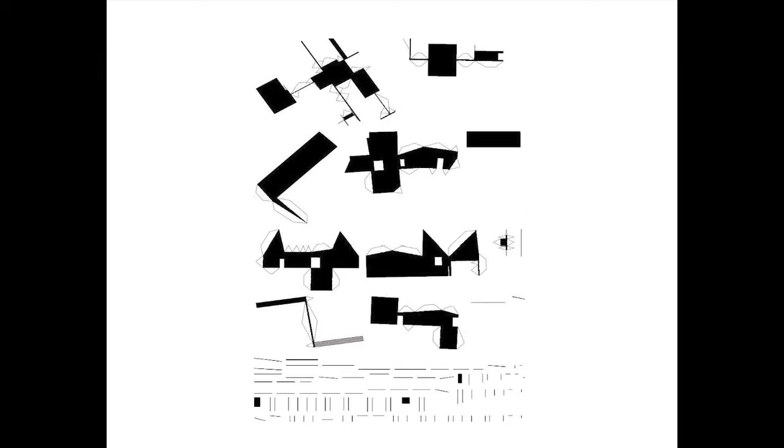So the kind of rooms developed out of the idea, because it needed to be modest. Studios are not fancy places. So it's concrete floors, drywall, nothing particularly exciting. So we were inspired by take-out Chinese food boxes, which is where this comes from. So I guess I should just walk you through how it's being used today, which I doubt is how they're going to use it a year from now. That was an existing studio. This is a pool house that we built so they could watch this house get built.

And then these are the white boxes. And these, which are clad in a burnt wood, which is a natural preservative by burning cedar. The Japanese use it a lot. They call it sugi, I think. These bars have services, closets and bathrooms. Green roofs where we could, photovoltaics.

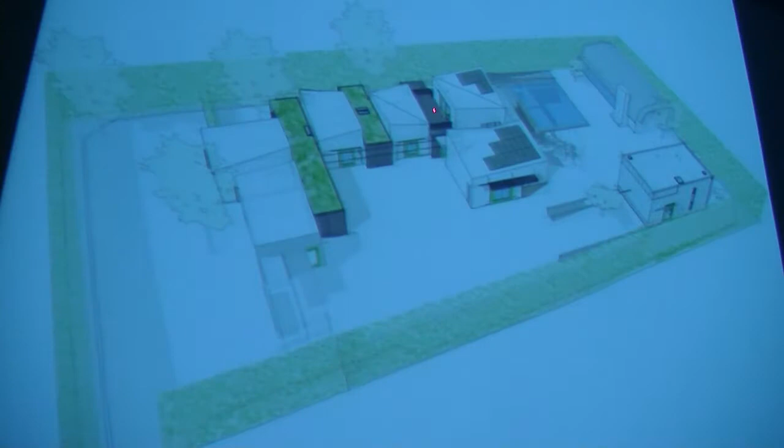So how's it being used now? Pool house at the moment is a guest house again because they've moved into the main house. But their kids are growing, and I guess in a couple of years' time, one or 2 of them will move from the bedroom they share now and maybe use that room. This was designed as a studio but is currently full of junk. This is the master bedroom at the moment. This is a dining room but started out life as a family room. At the moment, this is really being used as a family room. This is the living room, and this is the kitchen with a little den upstairs.

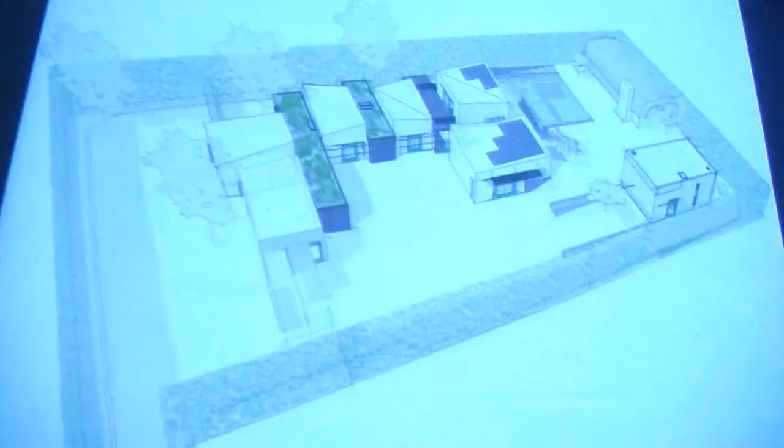And there's the pool. So what you've got is what we call in Australia a battle axe lot, and what you guys call here a flag lot. And it's surrounded by hedges that, if Jamie, the guy who owns the house, hasn't got his gardener to hack at them, are usually about 16 foot high. So they've got a very secluded, wonderful compound setting. And the idea is that you move from all of these rooms.

So that's the second part that flips it. So how do you make an indoor-outdoor connection that isn't about blurring the distinction between inside and outside?

Circulation runs outside. That's not particularly new. Traditional Chinese houses do it. There was a movement in the 1920s, and a bit before that in the States, particularly in Pasadena, where this house is, of the healthy lifestyle where people wanted fresh air, and the idea of moving outside to go inside was present in a lot of house designs. It also turned up in Australia in an idealistic community called Eltham.

But anyhow, here's the deal. It's pretty simple. These white boxes have a door on each side, which slides. They have a vent above, and then a highlight window that draws air up and through for ventilation. We're talking hot, dry summers, not as hot as here, 90s and 100s. You need heating in the winter, but it's a pretty mild winter.

So now I've got to go through this a bit more, getting bored with this slide. That's up at the top, next to the kitchen. And if you come down the stairs from there, you'll see another attempt at our investigation of very cheap materials, which we love - pegboard, used here as an illuminated ceiling. The kitchen beyond - you're just doing kind of a walking tour. The pool house, the pool, the garden, and the den above.

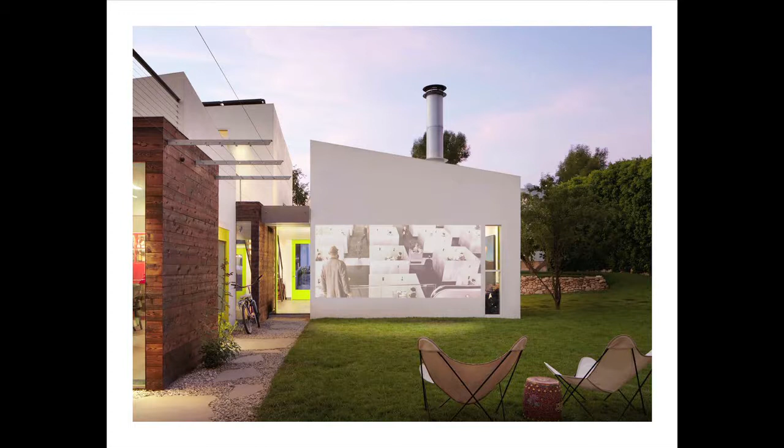And then coming back around to the lawn, around the studio, and then movies outside - why not? You can sort of see how the things collect. It's a fantastic party house, which I didn't purposely design as a party house. But we went there to a gathering to fundraise for the Architecture Museum in LA, and there were people all over the place, and it was one of the best things I've experienced for work that I've done, where everybody's activity was framed. It was fun.

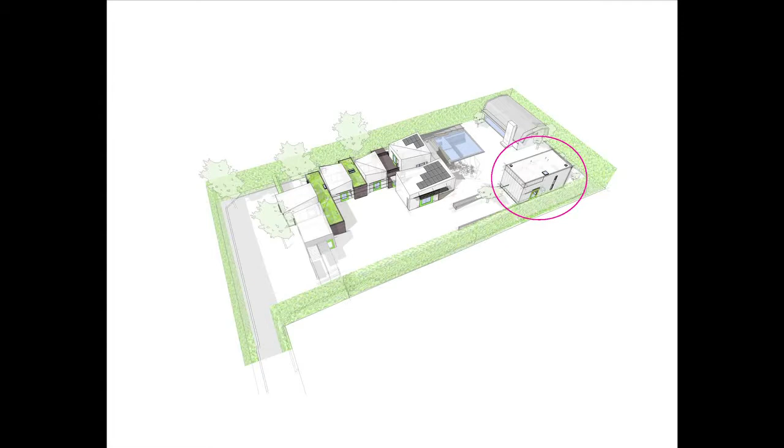I want to talk to you a little bit about the pool house, where I said they lived before the main house was completed. It, like the main house, doesn't have air conditioning. We wanted to be responsible sustainably, and so did they.

So we used a system called an earth tube, which is buried beneath the ground, going down 3 to 6 meters. In this case, it's using the old bomb shelter, because in California, people were worried during World War II that there would be a Japanese invasion. So these things turn up periodically in houses.

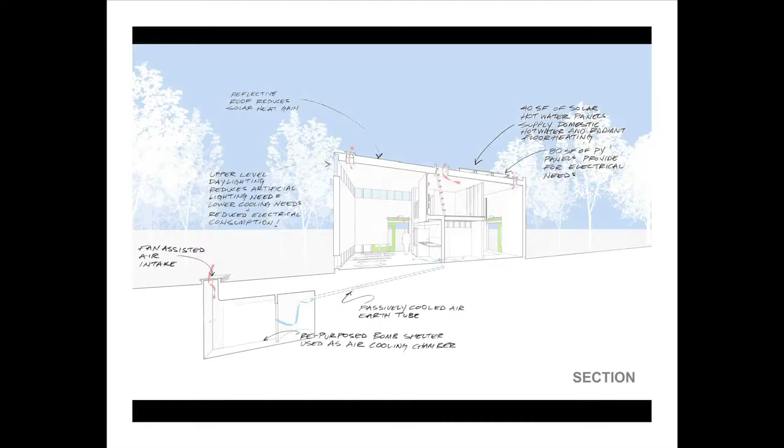For the house, the earth tubes run to a different place. But the deal is you bring air in, fan-assisted, from one side of the yard. You take it underground where the air temperature is cooler. It cools the air and brings it into the house. That way you can responsibly leave the doors open all the time, which these people were prone to do and still do, and it doesn't matter. So they said last summer, their first summer in the house, that it was comfortable all through.

And this is the pool house. You say, well, why is the pool house different? It's because we had an existing building, Anne Elizabeth's studio, which was a different genre of building. If we made one style onto that different genre, it would have looked like an outsider. So we made a building with a slightly in-between approach, collecting everything as belonging, not having one thing feel awkward in the setting.

In other words, to make what you have work well is equally important as to make what you have look good. Am I making sense? You get more value out of honoring what's there as well as what you make.

And sort of the views of it. That's just cellular polycarbonate with metal siding and drywall, blackboard going around, and that wafer board stuff. None of it is rocket science, and all of it combines to create something with an evocation bigger than the parts.

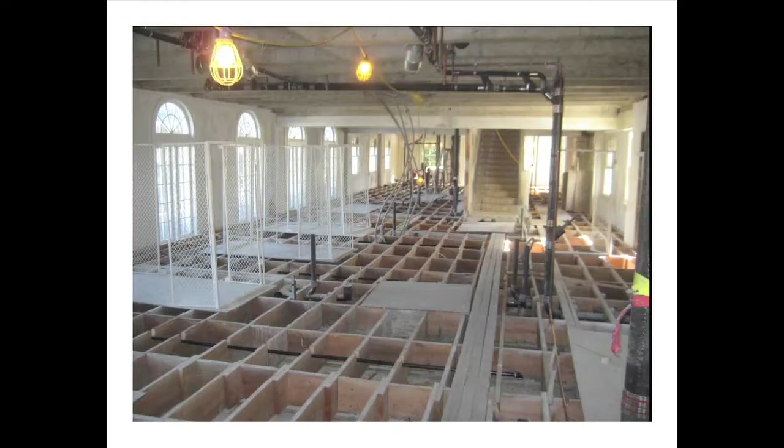If you want to add new systems into a building of this vintage, and you've got principal rooms on the ground floor, and you don't want to see conduits and ducts running through your ground floor, there's a strategy of introducing an interstitial floor, which is what this is. All the pipes and conduits run here so that the ceiling below can be free of any kind of modern service routing.

So downstairs, the ceiling is clean. Principal spaces were restored and cleaned up. Anything we added as if it was furniture, sitting within the space as a whole. This is all, for us, not difficult decisions.

We restored the gym. This isn't quite done, they needed to clean the railing, but the contractors are always sloppy, they will get to it.

This used to be the natatorium, which I told you is a pretty significant item in an African-American context. Why? Because there weren't that many opportunities to go swimming in LA unless you went here, if you were black. Although they needed this for the housing program, to be a lounge space, the pool is encapsulated so it could always be restored, and the tiles were kept, and the line of the pool kept, and a sort of narrative memory of swimming lanes used as a graphic, again, to divide a wall from a volume so that it doesn't belong to that volume. So the volume has some integrity still, even though it's serving a completely different purpose.

Housing units were restored - well, not really restored, extended - because a housing unit in 1926 doesn't meet the kind of standards for what you need in 2013, whatever it is. So they all doubled in size, and that meant that to take advantage of a grandfathering for parking, which is a long, complicated issue, the best use out of this property was to replace every unit that was removed. So we added, I think in the end, 30 units new.

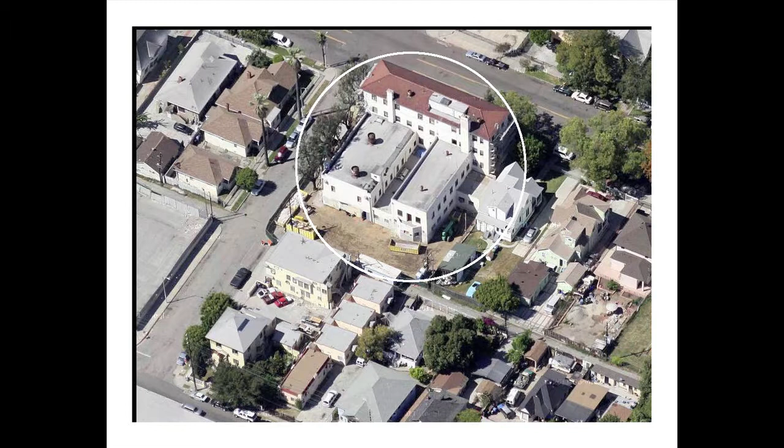Well, we did. So this is how we did it, because we followed the rules. The rules said that if you had a historic building and you wanted to take advantage of historic tax credits, which are an interpretation of how the historic preservation guidelines are interpreted in the state of California by a bunch of people who need to get a new life, because they're stuck in one way of measuring how you can do things. We have to keep experimenting about different ways, and they need to have more opportunity for interpretation, and this is not the case.

So what they wanted us to do was keep whatever addition we did below the eave line of the principal volume. That meant you built over a 2-story volume here, 3 stories excuse me - there's the pool where it used to be - and you could build over the back piece as well. That would keep you below the eave line, but it didn't give you the number of units, so the economy of the project was thwarted.

This is an affordable housing project, so they also wanted at each opportunity to make as many housing units as they could, because it's supportive housing for kids coming out of foster care, for people who had difficulty living in the world without medication, that kind of deal. That was tactful, wasn't it?

Okay, so we worked out if you do this, of course we can do that, but the client's not happy, doesn't have enough units. We start talking about what it means structurally, and this is a masonry building. This wouldn't be a masonry building, because we don't build masonry cheaply in LA. But the seismic difference between the two meant that the cost of doing this was outrageous.

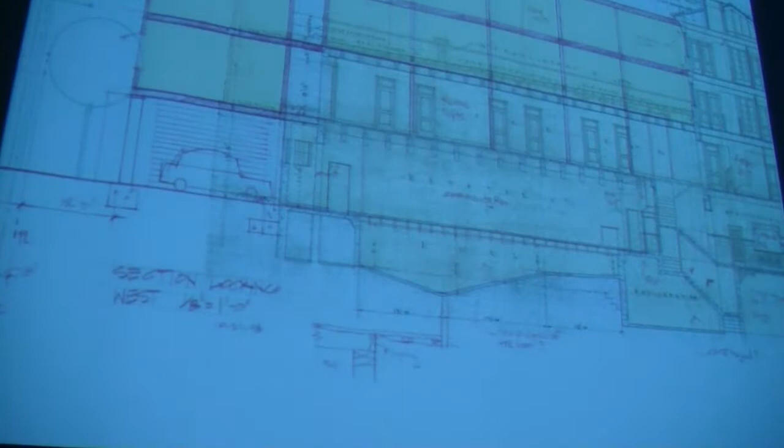So luckily, our client, who was an architect, said, guys, this is stupid. We'll give up on the tax credits. We will restore the building as faithfully as we can, which you saw how we went about it. We need another way to do this. And that's when we came up with this system, just building on the back part of the lot. Now, we're still in the sort of structure of how you make this, keep the integrity of the old building.

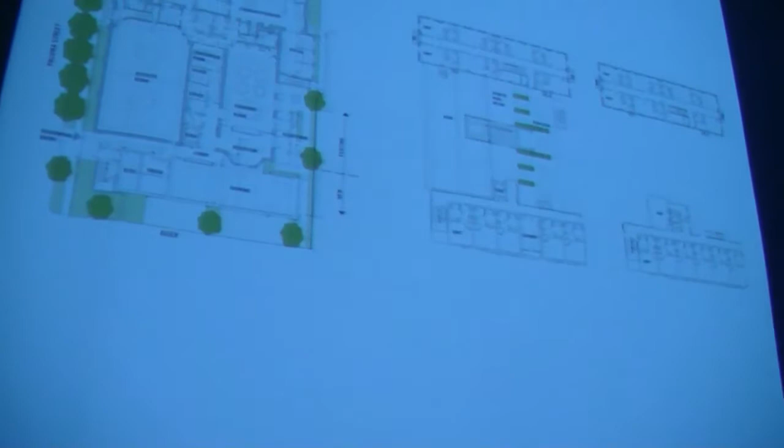So in this, we have two program components. Program component one is this, through here, entered from 28th Street, and that's community programs, which are available to residents of the building but run independently. And then we have a second entry here to the housing that is on this floor, that's the natatorium with the pool, and now is the lounge, that uses this space and the upper floors, okay? And they work independently and need to for program reasons.

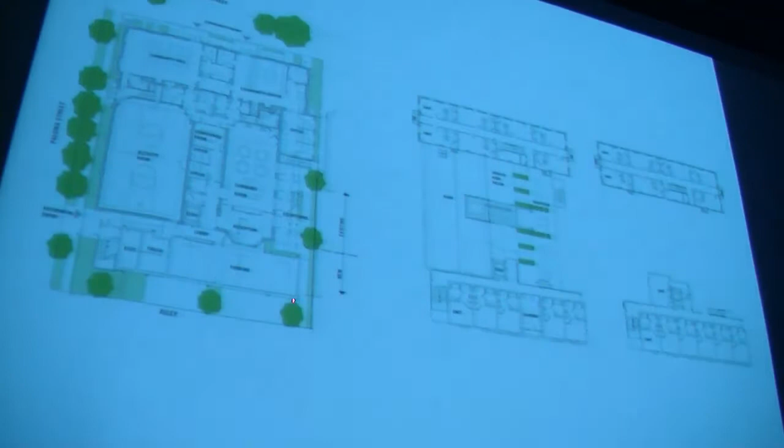So this was where the identity of this addition was going to begin. And what we did was we built higher than the eave line, not much, I think it's 5 or 6 feet. And there's a deck space here, which I think Paul Williams had anticipated you could put another floor on sometime, but at that time there was no seismic code, so that was a whole different era. And that was the logical place if you wanted to be expedient to put mechanical equipment.

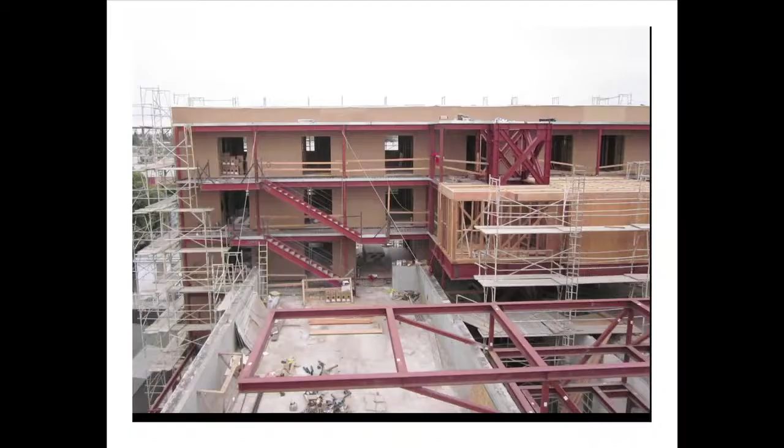And we said, hey, why don't we hang a truss in the light well? That means we can get the mechanical equipment to hang in the light well and across the roof of the gymnasium, which wasn't a flat roof. And that way we can release this roof here as a social space. And so we cantilever also from that truss an arbor that focuses what can become a social space between the new addition and the old building.

So doing that, we made a key social space for the project, which links old and new, and reveals completely intact the existing building, including the back, and the fantastic portraits of African-American leadership through the years. These are medallions, which have this beautiful curly Q ornamentation around them. So this seems to me like legitimate historic preservation that honors the past.

Now we get to the difficult bit. How do you add the really difficult bit of the weight? So remember, when you look at those buildings, what people conventionally look for is ornamental compatibility. And we said, that doesn't tell us anything strong about what that existing building was. Those buildings were masonry. They were heavy. If we do a light, ephemeral kind of cladding to our addition, we're going to show off the strength of the original while we make something distinctly different as the addition. And that was the route we took.

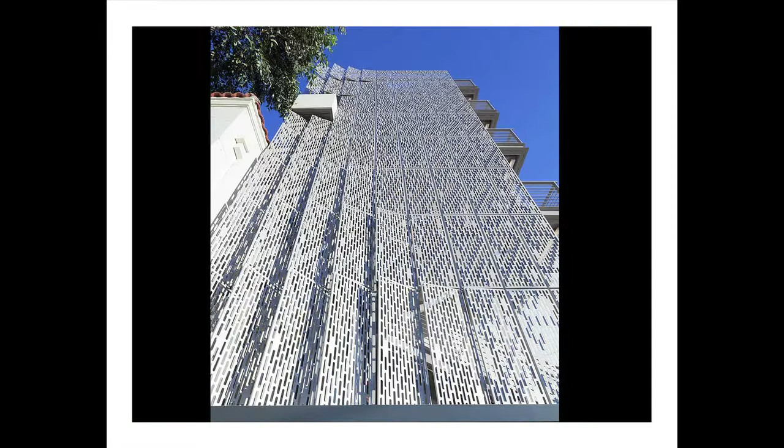And what you're looking at is punched screens. Could have been done laser cut, but we worked out there was some economy to punching it, the kind of thing that happens in our office. So this is feathering out this way so you can see views down to downtown. It turns out that when you punch, for very little upcharge, and still much less than laser cutting, you can cut aluminum so that you have hanging chads, if any of you vote. And those hanging chads can introduce a second level of pattern. In this case, the second level of pattern is drawn from that ornament that I referenced around the medallions.

And it was a key narrative for the community to understand why we didn't just copy the original building, which, if you don't think about buildings in a different way, is the only logical conclusion you can come to about how you would go about adding to that building.

So this was some of the tests. This is cardboard. This is fussing about whether it should be 30-degree angle, 25-degree angle, 35 angle. So you think you're crazy with your projects. It doesn't stop. You'll get out there. You'll do the same kind of craziness.

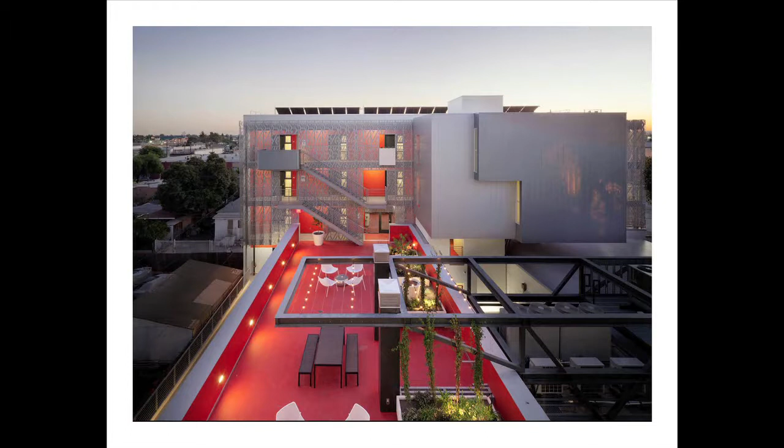What we found, which was an incredible thing, was how the pattern was ephemeral. At different times of day and different orientations, those hanging chads were visible or not. So the pattern came and went. So we got this added bonus of this kind of magic trick. And then in the evening, you look back over it and you can see the key components as I've set them up. The social space, the arbor that's really the top chord of the truss, the thin ephemeral skin of the building.

This cantilevers over to get the final 2 rooms they want. The elevator's in there. The box behind is a dumb stucco box, dumb as dirt. And the really strategically expensive strategy was this skin. All the rest of the money went into restoration, which is like a money pit. It's just like that Tom Hanks movie.

Inversion. So we've talked about weight. Now we're going to talk about turning ideas about the roles of things upside down.

I'm probably going way too slow. Are we okay? We're okay. All except for the guy in the back row that's snoring. Oh, hey. Wake up.

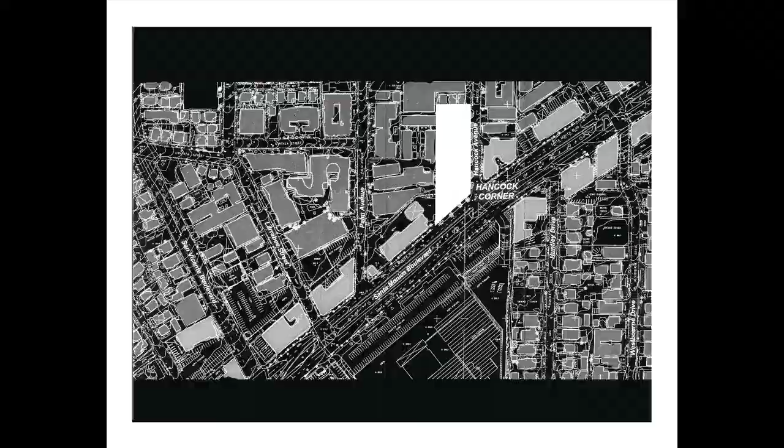So I want to talk about a market rate project, which is not a market rate, a marketplace project called Hancock Lofts. And if you wanted to put it into the sort of urban design category, it's transit-oriented development. And this is the components of it.

This is its location. This is Santa Monica Boulevard. Really busy street. Lots of stores and clubs and restaurants along it, and kind of the social heart of the gay community in Los Angeles. And then multifamily housing moving up the hills, because this is an uphill slope here. We're just at the foothills of the Santa Monica Mountains.

And Hancock Corner was originally a GTE facility, and the city had bought it. They wanted to redress a lack of parking for the businesses along the street, because the parking was rolling into the residential streets, which made for unpopular parkers. So they bought it with some transit funds, and then they set out to find a developer team who would develop the project. Their first instinct was to try and get movie and entertainment.

That fell through. And then they came to our development team, which was CIM Group with Koning Eizenberg, and said, we want you to go through a process with the community that looks at how we can build housing, retail, and parking. We don't know what the proportions will be. And we'll determine the price of the land when we see what the community will bear, seeing it's technically city land, and we'll go from there.

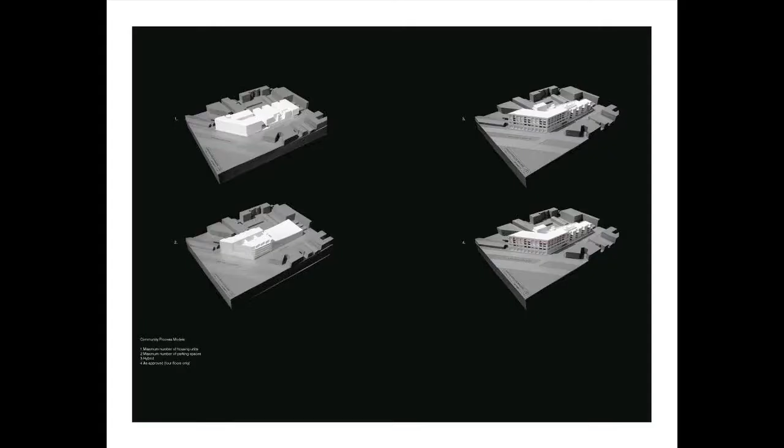So we went through a process with the community, who were very sustainably progressive. However, at that point in time, and still now, the relationship between density and sustainability is not well understood. The more you use the same infrastructure to support more housing and more amenity in the same place, you get more walkable streets because you can support more businesses. You also use the same infrastructure to provide for more housing or more space, so you're using your resources more effectively instead of going out to the suburbs.

Can't get that across. So we go through a number of configurations, and we settle on this one here, which could easily have been 6 stories high. That's why I'm showing that red line. It's got 37 units of housing, retail at the bottom here, and a lot of parking.

And the community was really not happy with this being, I think, 6 stories in that version, even though the shadow from this did no one any harm because it was across the main boulevard. But this is something we have to help with exchanges of information each time we go to a community process, and get people more aware of what can happen.

So here is the elephant in the room. And we had an argument at the office today, is it an elephant or a gorilla in the room? Is it a 500-pound gorilla or is it an elephant? Well, this looks like an elephant, but somebody told me it should be a gorilla. I like the elephant.

And you can see what the elephant is. Look, I got next to no housing units, 11,000 square feet of space, which is zip in retail. That's not even one big box retail store. It's nothing. And 216 parking spaces, because most of those are public parking. So how do I make something look like a building that's inhabited while I've got to deal with this thing? Plus, I'm embarrassed because I'm putting cars on a place where we know what we want to do is reduce the number of car users.

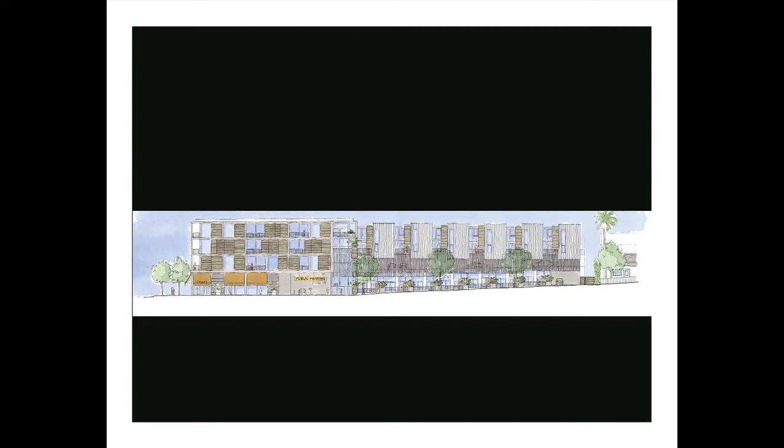Was that rough enough? So just to get you guys a giggle, this is how we used to do things in the old days. This is a little hand-drawn sketch with Pantone markers. And this was the sort of design that evolved. We're talking about 2002, 2003 when we're drawing this. This is the entry to the public parking that goes below grade. This is the entry to the resident parking that goes up. This is the affordable housing, which if you organize in a certain way, they can have lovely little gardens by the street, and they feel like active participants. My parking is in here, and I have townhouses up here with big decks. Okay?

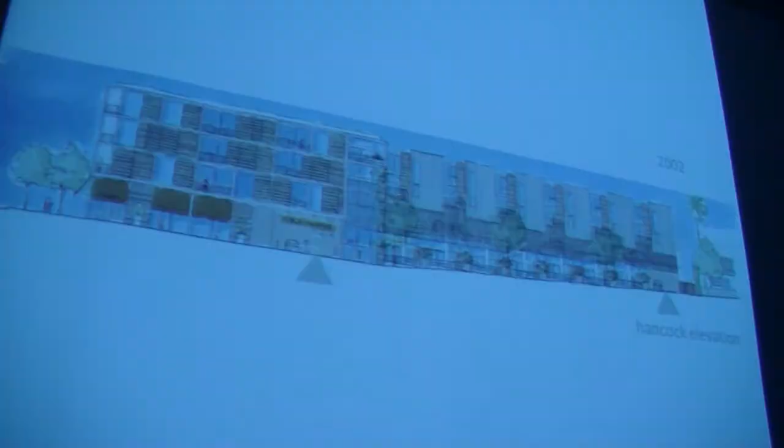And I'm going uphill, remember? So going uphill means I can connect this plaza, if I work it right, so it's kind of contributive to the idea of a hillside town, even though it's got cars in it. And for those of you who don't believe that plazas in hillside towns have cars in them, go to Italy.

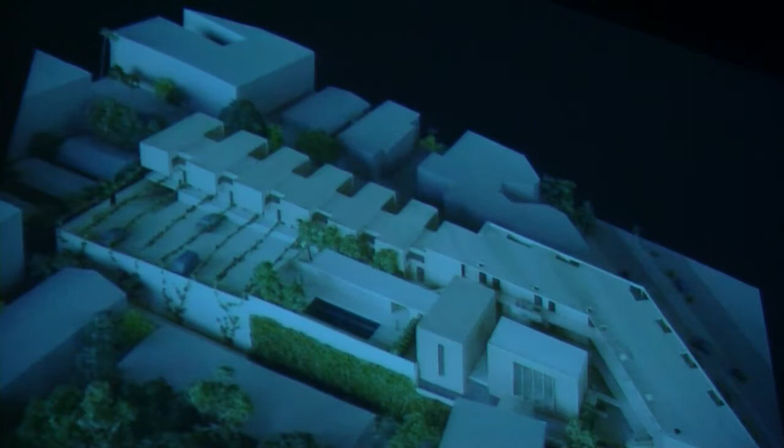This is built, and this kind of shows you in more detail for those of you who still read plans. Please read plans. I love plans. They're such beautiful diagrams. I love plans and sections. It dates me terribly. So this is the key section. This is the one that organized it. So what happens is there's that public parking going for that other parking garage. Here is the residential parking coming up and over the housing.

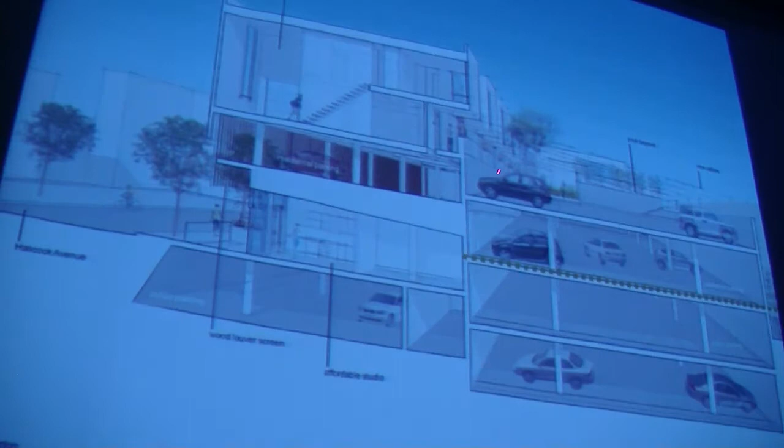So yeah, we've seen it over stores, but no one worries about the vibration to the residential unit. So with a little sound separation stuff, these units come out and they're fabulous. They're as cool as these. Different, but they're cool. So there's the parking rolling up onto the roof. So you can actually park for your townhouse unit adjacent. And this is how it came out. This is the whooshy developer shot.

And the parking is there, and so that wood piece here, which looks like a compositional element and sets up the balconies for these guys, is hiding the parking behind. So we've completely changed the balance of what the parking does. The parking is actually working for us to make the composition of the scheme. So it's inverted in terms of its role.

Normally, we're spending all our time just accepting that parking has to do something very dumb. And we've got to either hide it by putting a skin in front of it, or just accept it and let it do its stuff. Now, I borrowed the apartment trick from Ted Smith in San Diego, who did it in a building where he brought the parking up and over, and I encourage stealing.

So let's talk about the units that face the street. These are the flats, and these have sliding screens, which is great for sun, they face south, and is great for a sense of privacy. And this is January 2007, it seems.

And at that time, we realized there could be some economy, because we talked the contractor into these sliding screens. Not the contractor, the developer. So we said, look, it'll be cheap. They'll build them off-site. They'll bring them in. We did a mock-up, had one done, and that's what was going to happen.

So these are therapy rooms. There's workspace, and the great diagram you always get from clients is everything goes to reception. Now, the way this was organized in their mind was to do with how their staff did their work.

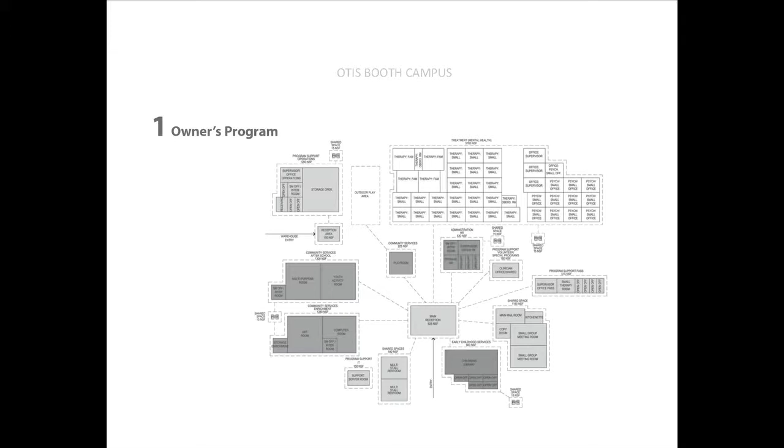Now, this has been a big shift, not just in this project, but in corporate America, that instead of focusing on the way you go about doing your task, which is a holdover from the machine era, basically. Because the idea was that if you do it most efficiently, least number of steps, all that stuff that made it easy for the worker to do their work, then you would have a happier worker and a more efficient worker. And people have discovered that that isn't what does it. What really helps is that the people working in an organization feel that they're connected to the mission that they do.

And as we talked with these guys further, who were on the way to reinventing themselves without us coming in the room, they wanted to do team assistance for the kids who came in, so that it wasn't just the social worker, it was a social worker and they brought in the local pastor if they were at a local church or someone from the school. They wanted to have a team approach to the kids so that they weren't taking the kids out of their setting. They were trying to strengthen the way they would feel within their setting. And this was their work change as well.

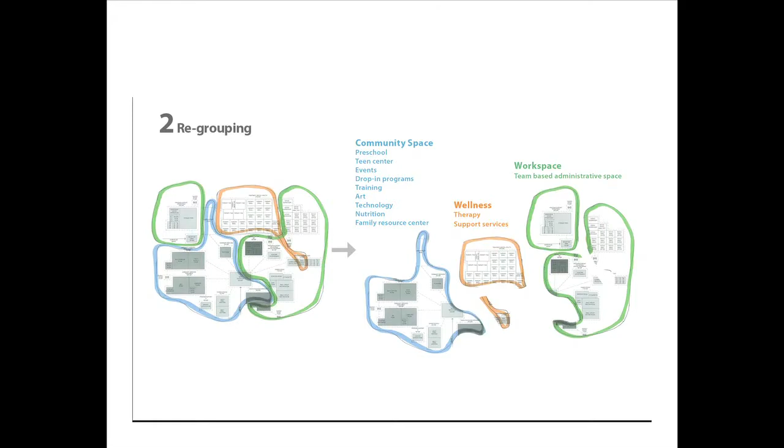So we sort of talked with them and started breaking up their program. There was a wellness program, there was a workspace program, and there was this community program, which was their way of giving back and getting people to trust them in the community. So we said, you know what? We can do all the same relationships you would need, but let's take it as a social setting rather than as a service provider setting. That changes everything. Then the personality of this building for that kid walking in the door is a community center, not a clinic.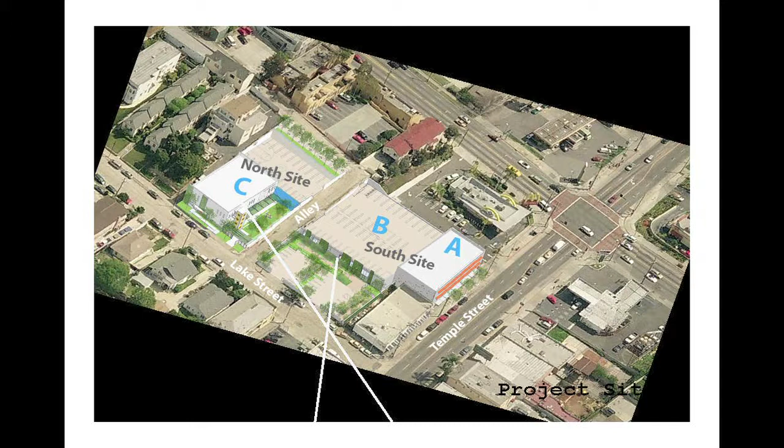Here we are in Los Angeles, in an underserved community, minorities. This is the fabulous building that they got us. Naturally, it's one of the most expedient commercial buildings we've come across, and it was split on two sites. And as I keep going, you can see it was pretty attractive. So this one became the preschool. This became the front door to the community center, which is the Otis Booth campus as a whole. This is inside.

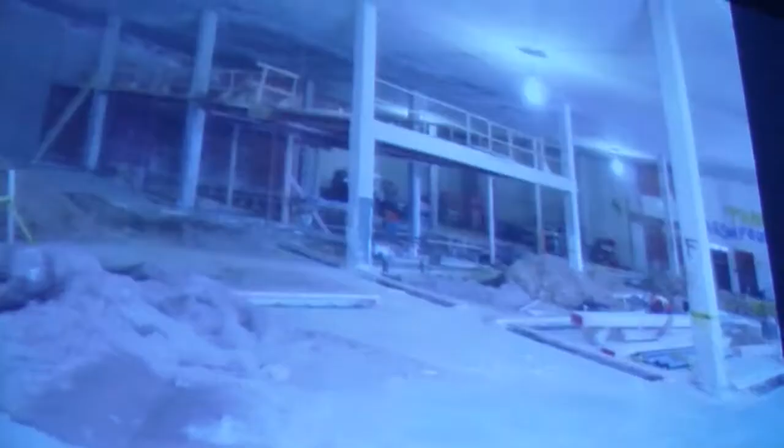And this is the fabulous interior. I mean, this is not a charismatic industrial setting. I think Jorge drove me by those incredible glassy buildings by the river. Now that's a sexy industrial building.

This had windows facing only on one side, facing west, which is just the worst exposure in LA. And it had a pre-stressed roof with cars on top, so you couldn't put skylights in it. McDonald's is over here, on the boundary line. So you have one side of light. We had to make it feel like the light moved in a long way to get the kind of energy and ambience we were after.

So here's kind of what played out. The blue is the community spaces, and they kept expanding as we talked with these people. Once given the opportunity to think about how they could use their community programs, all sorts of things happened. We introduced a nutrition program. We've got a garden, an edible garden. We've got all sorts of stuff.

But you can see these are the wellness program, the therapy units, that don't have waiting rooms. You don't go to this place, sit in a waiting room, and go get your therapy. You hang out in the community center, and when you need to go and see someone, it's like going to a classroom or a meeting with somebody. So you normalize the activity of seeking help. And that makes a big difference to how kids will feel.

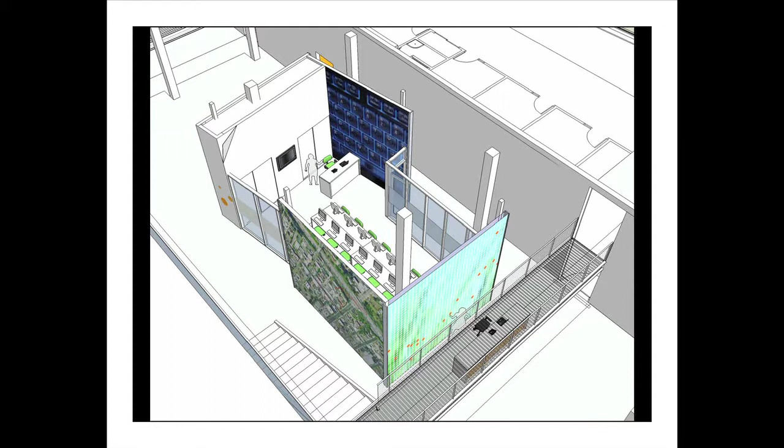The lobby as you come in, and this screen here surrounds what we call a curiosity box. It was a device we introduced to start conversations between therapists and kids. If you're coming for the first time—there's plenty of people who come here, it's just a normal community center—but for the ones coming for the first time, being introduced to a therapist, somebody has something to look at to start a conversation. So we're here, where's your house? Where's your apartment? So you can engage in a conversation to help break the ice.

And then around there, again, this is linking your everyday life with your professional life. When our kids started elementary school, they did cootie catchers. Did you guys do cootie catchers? Yeah, so cootie catchers was in my mind, and so we did this little origami wall. When they have their events, what's become very popular is to try and make the origami that's on the wall.

We kind of liked the symbolism of this, that inside the curiosity box was a tech center to improve digital literacy, and also to give more advanced programs in art and technology for the kids who didn't have access to computers in their own houses, which is more people than one would like to admit.

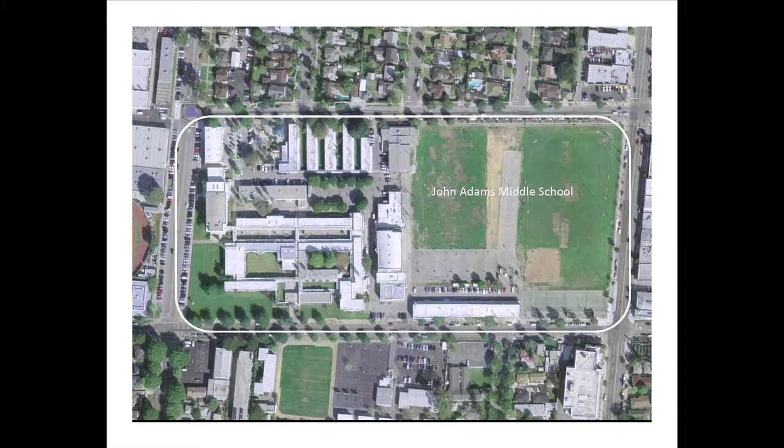So here's John Adams Middle School. It's a 1,000 kid school in Santa Monica, built over time, but mainly in the 30s and 50s—these great cross-ventilated buildings. Unfortunately, these had come to the end of their natural life. But the rest of the school had this great kind of vibe,

except strange things had happened. Big expanses of open space here were underutilized, and this space here, the lunchtime space, was overutilized. It was concentrated because the vice principal wanted to keep his eye on everybody—he was keeping whatever section of the school was allowed to eat lunch at that time in his sights. And I said, as we were presenting to the school, we've got to change this. It looks like a refugee camp.

He reported me to the superintendent because he thought I was talking about the ethnicity of the kids, which hadn't crossed my mind, but happened to be predominantly Hispanic. It's just like nobody should be treated like this. I hadn't processed that part. I didn't get scolded by the superintendent then, but I am being scolded by the superintendent now, for other reasons.

We'll get to that. Finding things hiding in plain sight is not always the best idea. So you looked outside and then you looked inside.

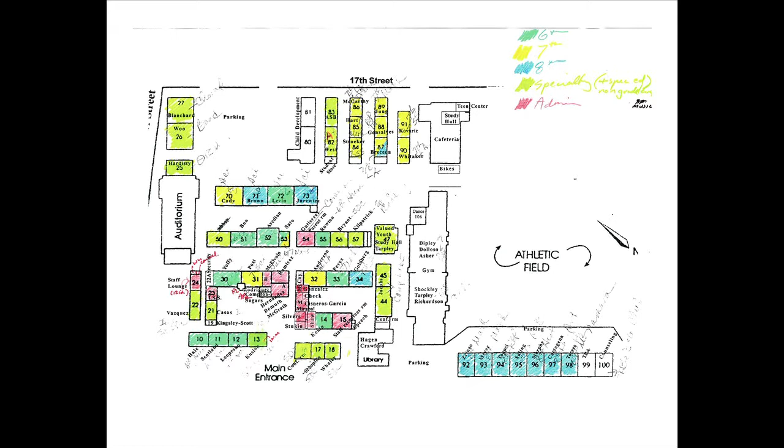We worked out as we went around that if we added a little piece down here, because we needed to make a secure entry, and we replaced these which were irretrievable, and moved an art room here or there, we could actually just build 9 classrooms and use the money to do some other things. So that's what we did.

We did this in an interactive design process with parents who were really into it, and the district, which had a sustainability hook as their mechanism for change. The school teachers were a little less enthusiastic, because I think they were protecting what they knew they had rather than trying to aim for something they weren't sure they were going to get. I don't blame them, but it's a difficult position we've put educators in, that their expectations are so low. So this is kind of how the budget was hierarchied.

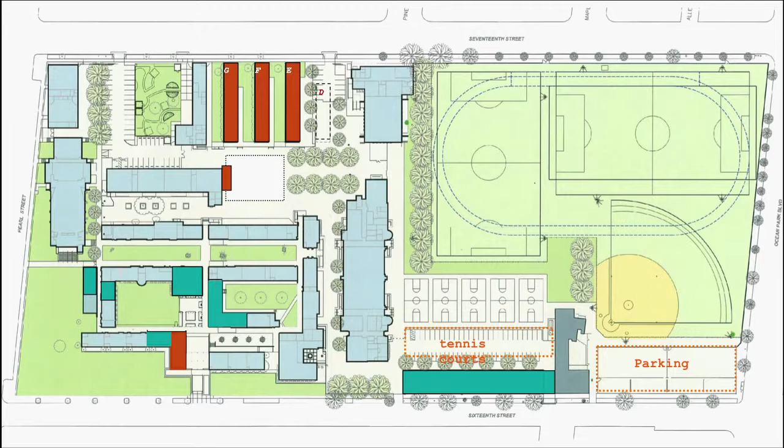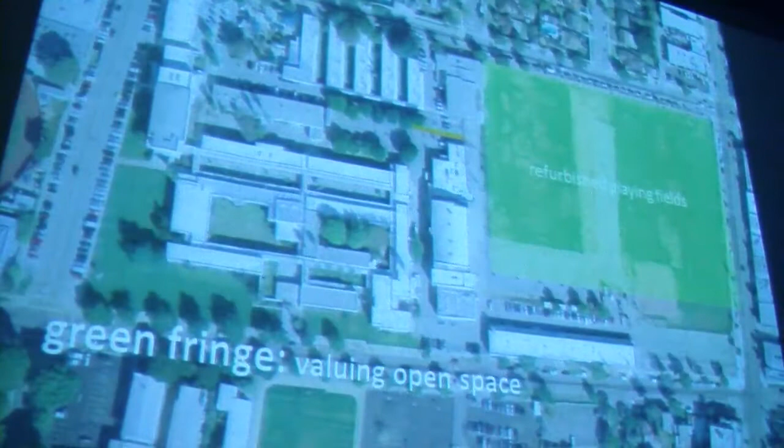I won't go through it, but there are 3 key components, I'll just go through them quickly. I said, if you're going to say the environment is important, then landscape should be valued. And if you can introduce indigenous landscape to get kids familiar with what grew somewhere, that's an educational opportunity.

They were refurbishing the playing fields—the college over here, Santa Monica College, which is a 2-year college, was refurbishing the playing fields so they could use them, not with grass but with artificial grass, because it was less water and all that kind of stuff. But when you have artificial grass, you can't take food onto it, and they're pretty protective of how it's used.

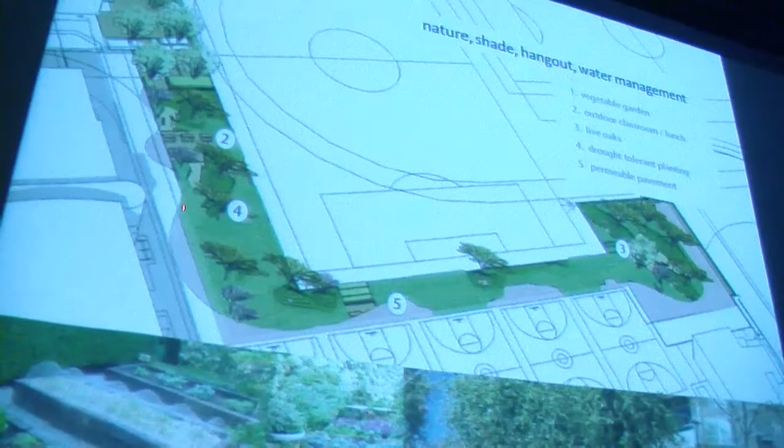So we designed—oh, that's what it looks like. This is what you're saying is quality environment to kids. Active play on a playing field is great, but anything in between is asphalt. So we introduced this layer between, which meant on weekends when there were games at the school, parents and younger siblings could hang out. You could have a different place to hang out at lunchtime maybe, if the vice principal would let you. There was shade, there was texture, there was the ability to actually learn to appreciate a tree because you see one.

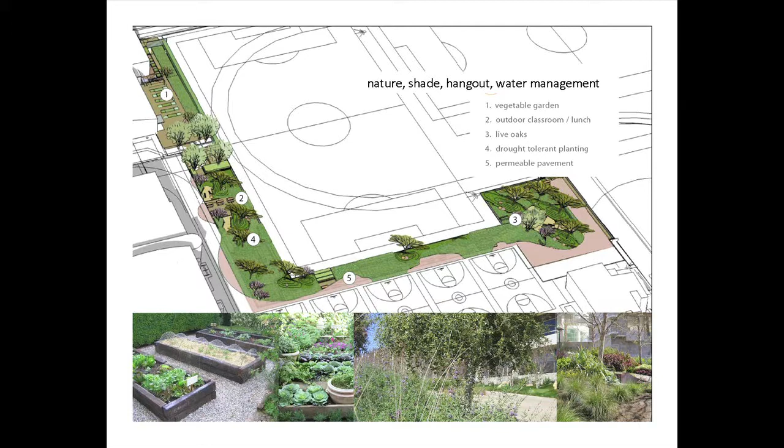Oh, an edible garden, which they had started already in another location. All this is about, for urban kids, a new entry—not just the physical gestures that you make that suggest something is welcoming. This is the school now.

It's kind of cool, except because of this whole security issue, you have to these days have administration on this side of a main gate, so that when you don't have your kids coming and going at the beginning and end of a day, they have to pass through a security section. So we put that extra building there. This is that extra piece of real estate—we need a gate here, and you need to come into the administration this way and go into the school that way when it's not beginning or end of the day.

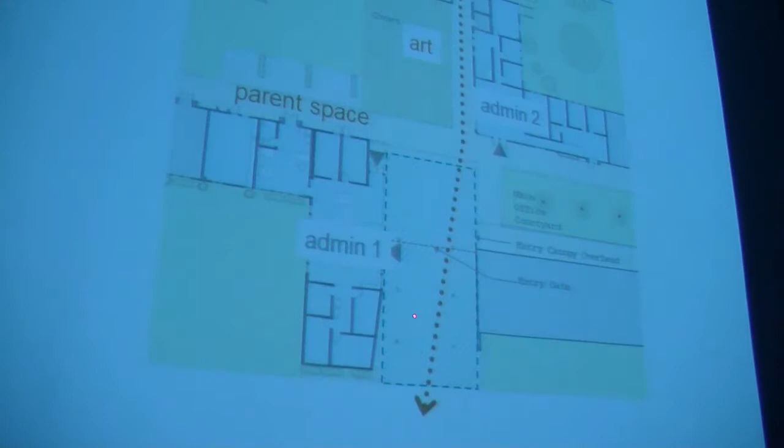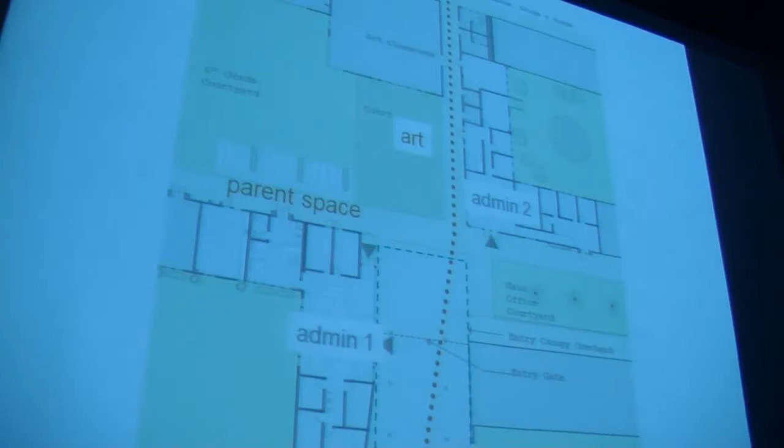We took this admin space here, which relieved that administration space. We reconfigured that one, and we did this. So now when you come in, it's a much more exuberant experience. It comes to a parent space where you can hang out—a lot of the minority families in this neighborhood, which are Hispanic, sometimes parents hang out during the day, sometimes grandparents hang out during the day. It made a way of making contact, and also for parents who were just over-invested.

You have parents like that, or you were a parent like that. They want to get involved with the school. So you want to create a sense that the whole family is welcome.

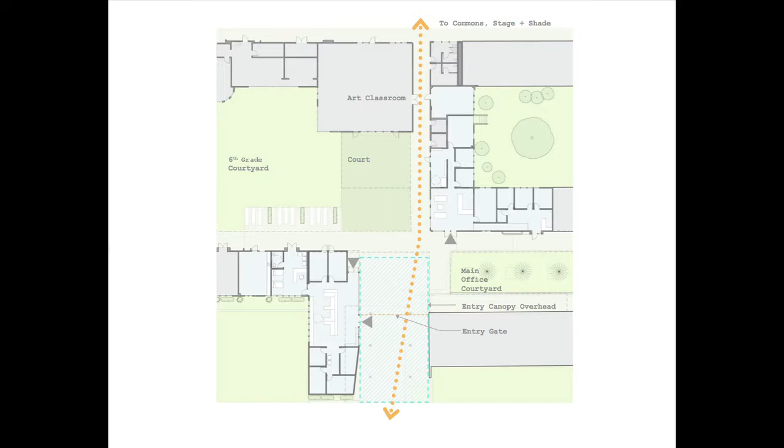Instead of saying art is something we can't afford and is dispensable, we put the art room where the administration is, so you see it straight in at the front gate. This changes the whole dynamic of the energy, the sense that things are valued, and we're really excited about it.

It's nearly done. Planting is delayed because the district thinks indigenous plantings can't be done with a maintenance-free agenda, but they've not tried it. It's tough. And why not do something that's a little bit more than sensible?

The new classrooms. So we talked about this third teacher stuff. This is one where there's actually an implicit learning opportunity that I can point to, and we'll see it.

So we didn't want to use air conditioning. We wanted to cool these buildings that need cooling. Heating is provided another way. This is another variation on the earth tube idea.

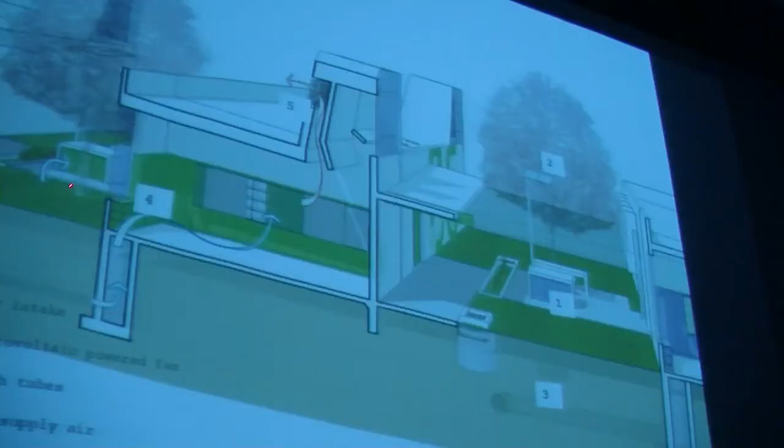It starts as a sketch, develops into a viable idea with great mechanical engineers. The air intake is here. There's a little photovoltaic panel that drives a fan, so the air comes in, goes underground, comes up and through. Because this is facing south, sounds completely counterintuitive, and it's glass, it superheats and that induces the draft up and through.

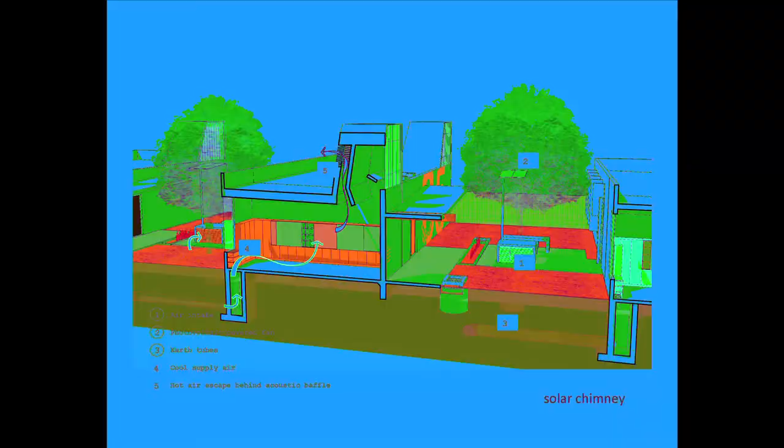So now, could this not work perfectly? Possibly. But if we don't experiment with other systems, no one's going to tell me that what we're doing now is right. The dumb double-loaded corridor classroom is a bigger risk than taking a risk that we'll have to do something to shade that glass if this doesn't work. It's not the end of the world. But everyone is risk averse.

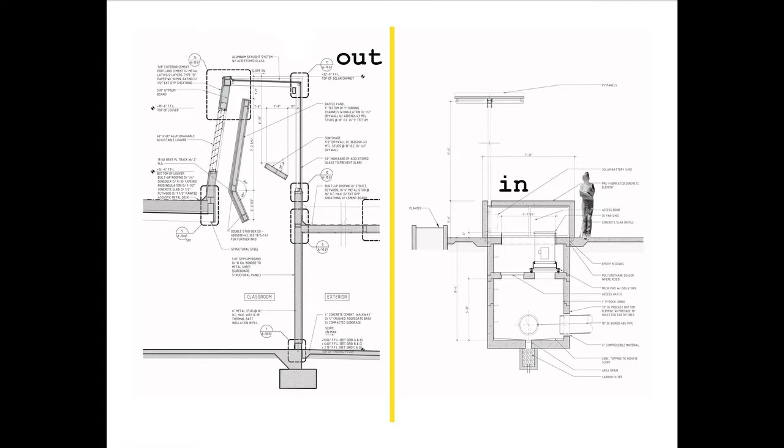So this is the technical drawings. There's that big earth tube coming up out of the ground. A redesigned lunch space has bleacher seating, expanded seating options, all in plain sight. Here's the view from the street, the other side of the street.

And we're nearly there. The classrooms don't look all that scary, even though they have a solar chimney, and the light comes in quite beautifully. We spend a lot of time checking shade angles so you don't get direct sunlight in the classroom. It's beginning, the bones are emerging.

Last category of thing: these are community hero buildings. We had restored a park called Virginia Avenue Park and expanded it way back, and this picture was taken in 2009 when it was complete.

And we came back for another round to add the Pico Branch Library. You can be a hero anywhere with water, so I recommend it.

And the park is really working. We had old warehouse buildings that were reconfigured for different kinds of programs. It has a teen center with an armature that they can add things to, although they chose to add it where you don't have the armature. They're teens. What can I say?

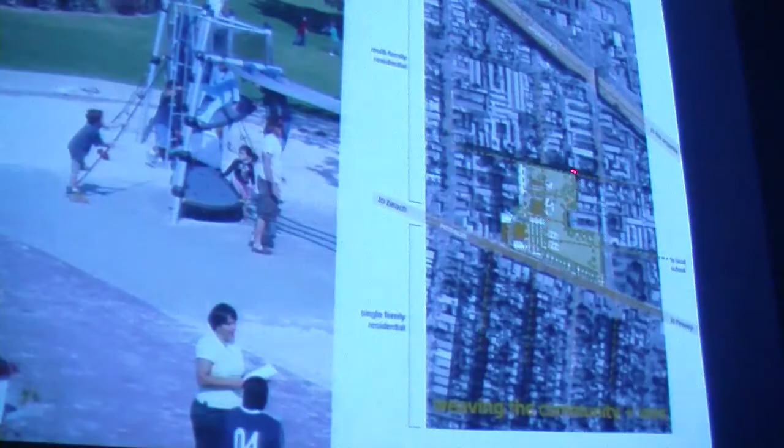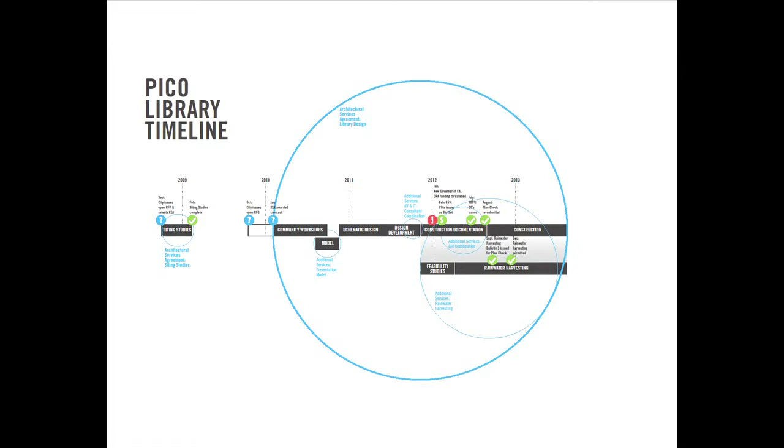And just because I thought you might need to know: first of all, there's a phase where you work out if it's feasible to put it in the park. Then you go through this huge community process. You can't read the years, but you can see it takes a long time. We're in the ground now. The steel has just gone in. And I think this started in 2000 and whatever that date is, 6, 7? Over here? Can you read that? 9. 2009. So we're 4 years.

So we knew the park well. We knew where the problems were too. We got all this working great. The programs across were working well. We knew that this was a great picnic area. The community had very cleverly said, when we did the park, we don't want a field that's big enough for organized soccer to take over, because otherwise you can't do the pickup game wherever you want. So they were smart people.

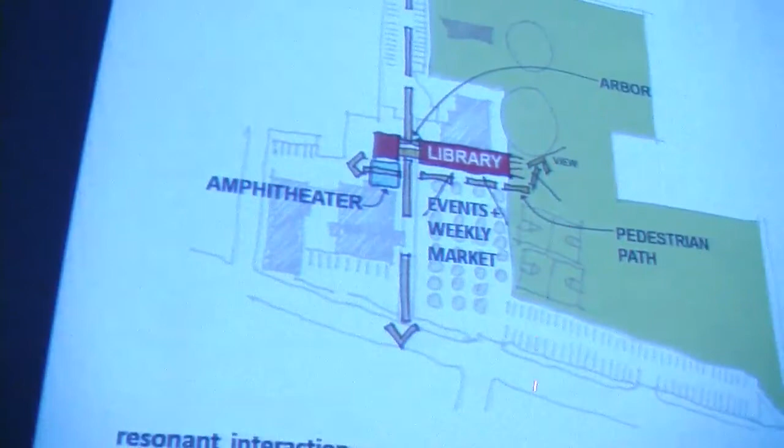And then this is where the farmers market is, great on the weekends for events, but dead during the day. And we were starting to see a drift of the kind of drug dealing that had happened before that we got rid of. So this looked like a very likely place to put a library. We went through this process with the community. They also told us that you can't take any of our lawn, which was fair enough, having gone to the trouble of opening this park up, north to south, and this route. Don't take any open space away. And there's a fire lane here, which we needed.

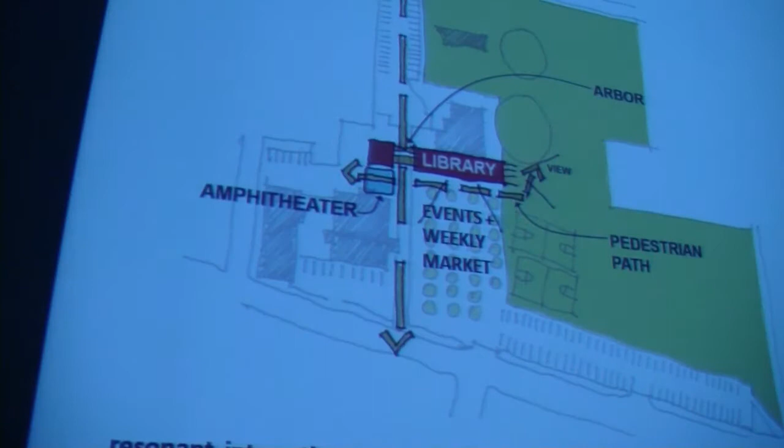And so we convinced the library, which was tricky, to split off their community room to become part of a campus of programs and activities, of which the library was one, and the community space that the library comes with. They control the programming, but the space could be across the fire lane. We made a little amphitheater here, and what the librarians were great about is, like us, they wanted resonant interaction. They wanted the library to be open and the seating where you could eat food bought at the market to be right out their front door. The more you can get people to bump into each other, the more muscle a building has to do things socially for you. But we also wanted the building to be muscly.

Well, there's the plan for those older, more sophisticated people who like plans. And then the rendering showing that we're starting to say, look, we want buildings for communities to be aspirational. We'd seen, and I should have got a picture of it and I forgot, in Bogota, Colombia, a more extreme situation where the favelas have nothing, the government came in and put in these libraries. And they're mostly fantastic places. And they told us, again, we don't have to be original to see things hiding in plain sight, we just have to look somewhere else, that it was a way of raising a sense of pride in community. So we said, from now on, our buildings are going to be heroes in community settings. And this is the first of them.

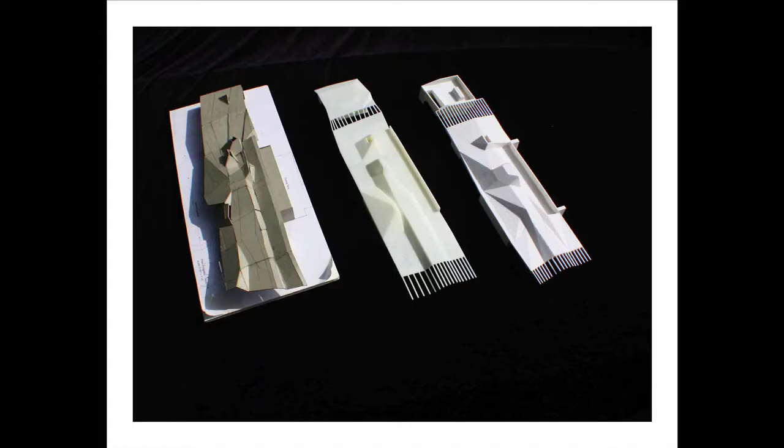We'd been pretty polite working on small budgets until this one came along. So it has a sort of muscly roof, but it's not a muscly roof that came about for no good reason, because we've been steeped in so much practicality for so long that we can't do that. To have something do one purpose is a waste. So this roof is organized so that there are skylights that balance the light coming from outside to do two things: reduce the glare inside and increase the visibility in, especially as these days with the glass assemblies, even when it's well shaded, the tinting of the glass makes it harder and harder to get that clear visibility in. So we've increased the chances of that happening. We know that it won't need electric lighting during the day because it'll be daylit.

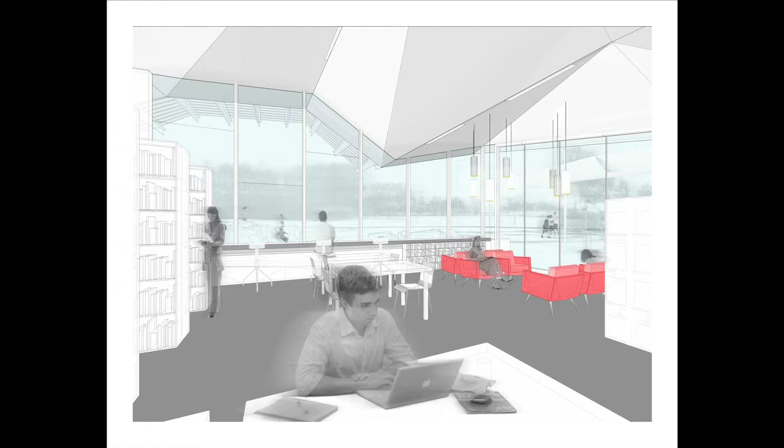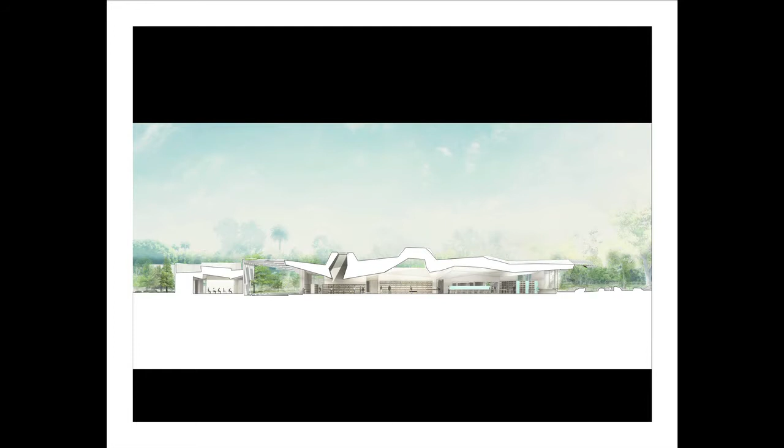The model, the aspirational interior, and no sunlight touching the books. Thank God for those sun modeling programs, and let's hope they're right. And then the way it hooks inside to outside. Different kinds of seating. This is actually like a counter that you would get in a coffee shop that looks out to the playing field there. And the way the whole thing gives an identity for the library that extends from the community room, changes the personality of the fire lane, which still complies, still 14 feet, and then the library extending out into the landscape. So this is more in the tradition of the California modern house, to blur the distinction between inside and outside, especially in a situation where you can't take your books outside, right? There's a security issue.

And sort of suggesting how it might feel, and knowing for sure that we'll now have programs when this is complete during the week that may happen out here on picnic tables. And that there's eyes on that activity, which is all good.

So the final project, and this is the extra muscly community hero. This is a project which I've shown some of you already, which is a park called Park, and it's in Seattle. And the idea of this competition was that the AIA organized a competition called Urban Interventions. We were a finalist in that competition. It was a blind competition. And what they were trying to do was look at competing needs at the local community and tourist level. So if anyone's been to Seattle and the Seattle Center, that's where we are.

And what we said, well, why don't we flip this? Generally what people do is they use the tourist stuff to make the big idea. You know, that's the Bilbao effect, the really important cultural building. They had plenty of cultural buildings there, so they really didn't need another. We said, well, what if a community building and the landscape combined to be the heroic gesture? So that you build neighborhood and authenticity first, and people love authentic places. You build its tourist attraction by making it a better neighborhood. And that was the philosophy behind this approach.

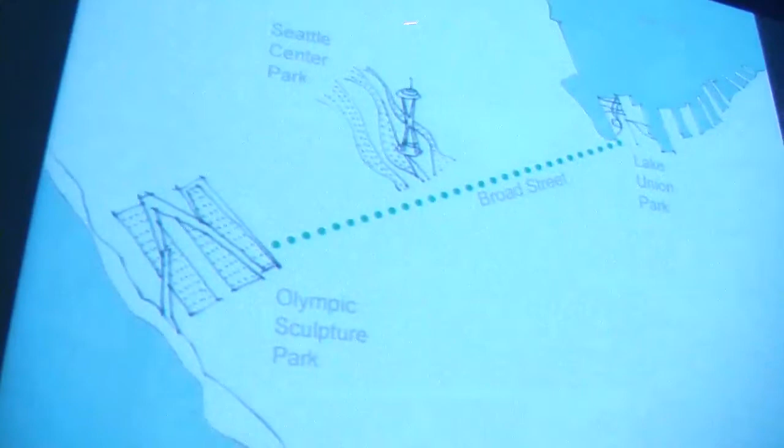So it's located at the crest of the watershed, so that's one body of water, that's the other. There's a park on the water's edge here, there's a park on the water's edge here. This is about being at the crest of the hill. Not a huge crest, but a crest technically, nevertheless, for the watershed. And Broad Street runs through. Has anybody been to Seattle? Knows where I'm talking about? Okay, so I can't make it up.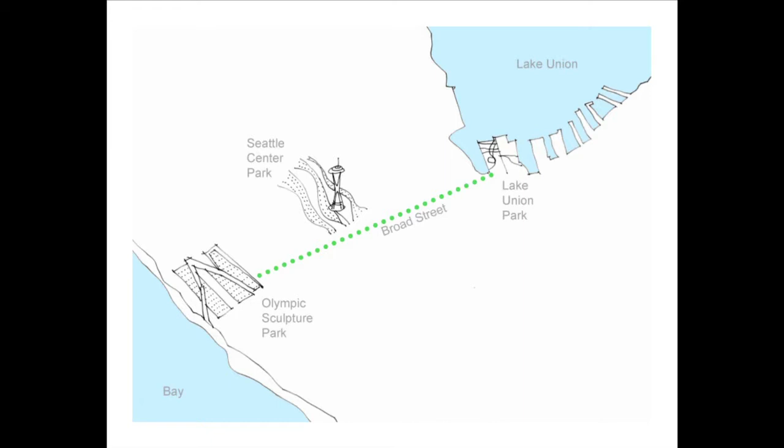These are the kind of stuff that's already there. So there's a Space Needle, the Science Center. The Space Needle has a monorail that comes from downtown and ends up in the Experience Music Project, the Gehry project. The Gates Foundation is across the road, the Key Arena, a children's museum here, a Chihuly Museum somewhere in there, the Science Center. You get the picture, right? And then here was the piece of land they wanted us to look at specifically and talk about how it could connect to everything else.

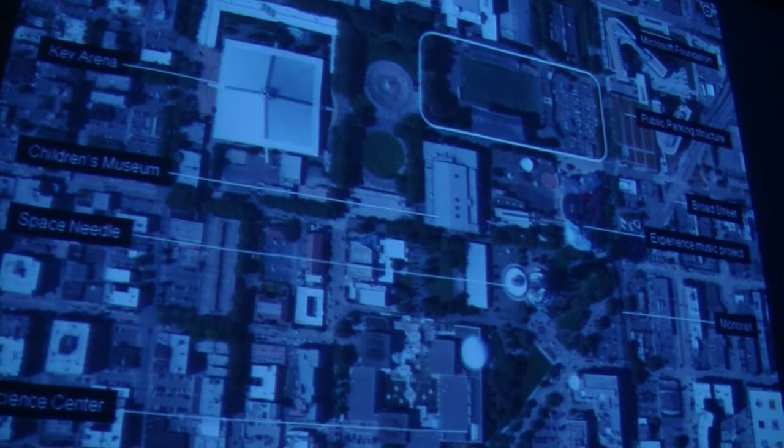And it was a stadium and a parking lot, and everything was very fragmented. And we said, you know what, we like the program of community uses. What do we do with this? First, we needed to say, look, let's make this one place, not a patchwork of places. So the idea of this fabric evolved. That fabric had to be not just sensible, but extraordinary, and we came up with this rolling landscape, remembering that we're on the crest of the hill, that the sensibility to us for Seattle was that people had their feet in their city, but their head was in the wilderness. That there was a real love of nature that you feel in Seattle.

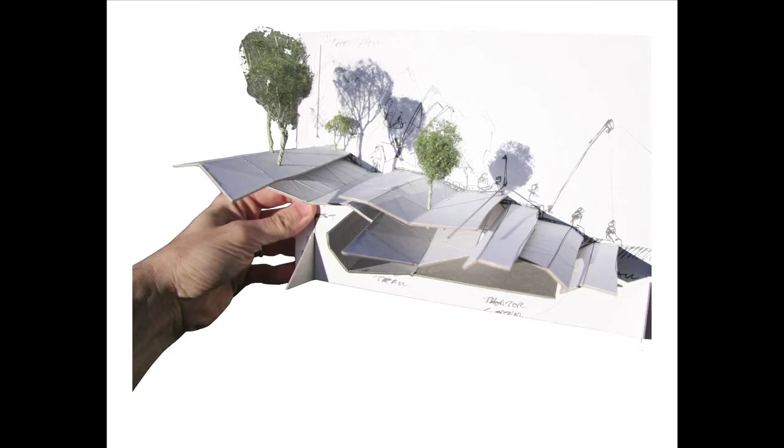And it became opportunities to craft smaller spaces and bigger spaces in the landscape. But again, it's a little bit like the Children's Institute Otis Booth campus. The real deal was to change the mindset of how all the players thought about that opportunity, which is not necessarily doing any architecture or design. It's that the school that owns this and the city that owns that and the guy who's got the lease for the Space Needle and the people who run the Children's Museum and the people who run all these things, to feel that there was a vested interest in making something together.

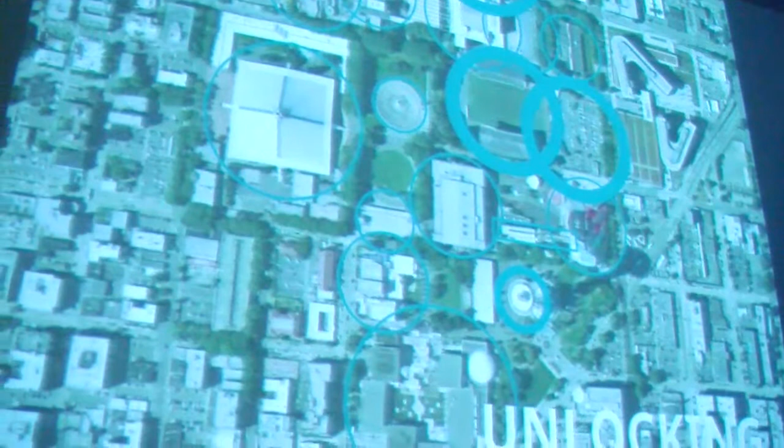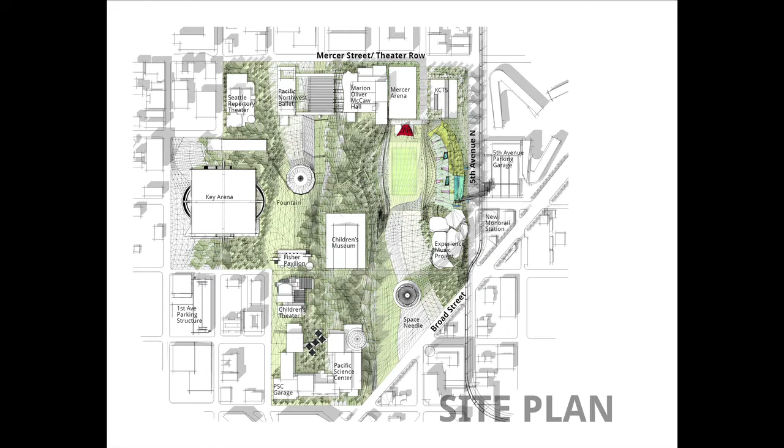And this is increasingly the case in our cities. As land is at a premium, you've got to get lots of players to the table to make change. The site plan. So the first thing we kind of thought to do was to extend that monorail, so it was a neighborhood monorail. We didn't realize at the time, but there's a whole contingent of people who believe this should happen. That the monorail shouldn't just be a tourist thing, it should be extended to serve the neighborhood.

Create a landscape that is wild and groomed that runs through the site. And because we didn't quite have enough room to get enough wilderness, we made this sort of borrowed landscape so that the top of the stadium seating is a wilderness as well.

And if I go through this, it will slowly go through the kind of components, which isn't fair to you because I've gone on too long, but you're going to be stuck. You're going to have to watch it.

So it starts with the fountain court on that side. It hooks to the forest with the rolling terrain, which incorporates picnic terraces.

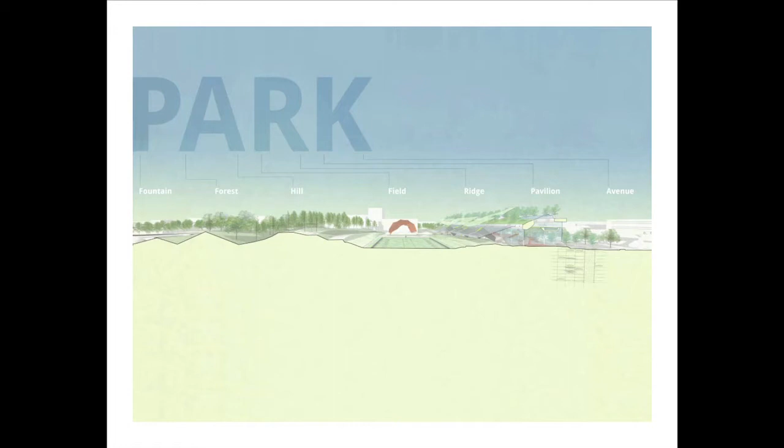Don't you like me reading for you? Because I don't think you can do it by yourself. It's Friday.

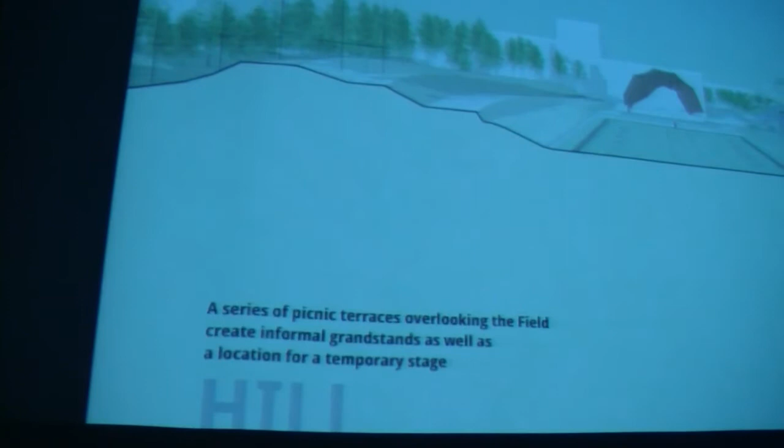And then the field, so that you could have the sports events that they had for the high school. You could also have the music events and stuff that they have often in Seattle in this location. Most people who come from Seattle tell you about some event they went to where they drank too much, but the music was fantastic, and it was there.

And this landscape evolving into this community building with pool and community facilities, and I think we called it the pavilion. And then there was a transit hub and a rebalancing of the street on the other side.

And there was music that went with this, but not all audio is heard the same way. Oh, I can just get to the next slide, never mind.

So there is the thing, and as we were going through this, these were the kind of principles we were using. Rebalance streets, which is a not unusual thing, is like make them work better for pedestrians as well as for cars. This street moves very fast at the moment and doesn't need to. The monorail connections running across.

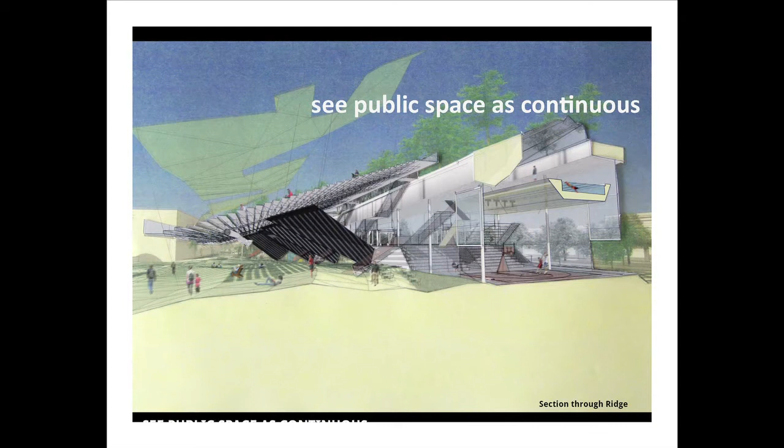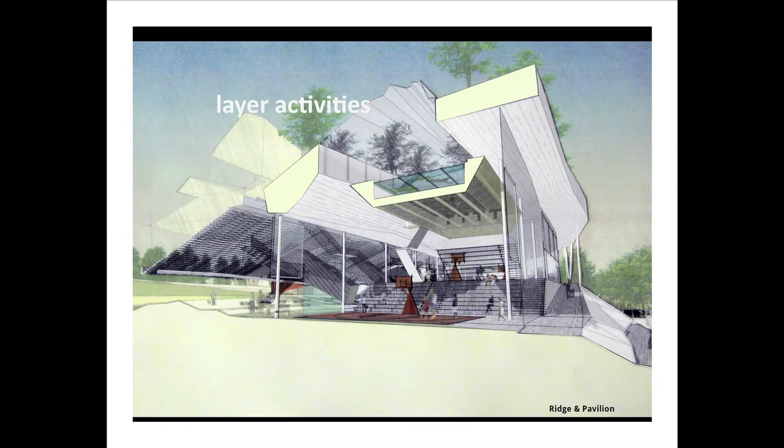See public space as continuous. So instead of locking up, instead of thinking that one thing began here and ended there, get more ambiguities of space that could be used in different ways. Layer activities. So what you've got here is, what do you have? Basketball at the bottom, swimming pool further up, more gym equipment and stuff like that. This is all stuff that the high school needs and the community can use.

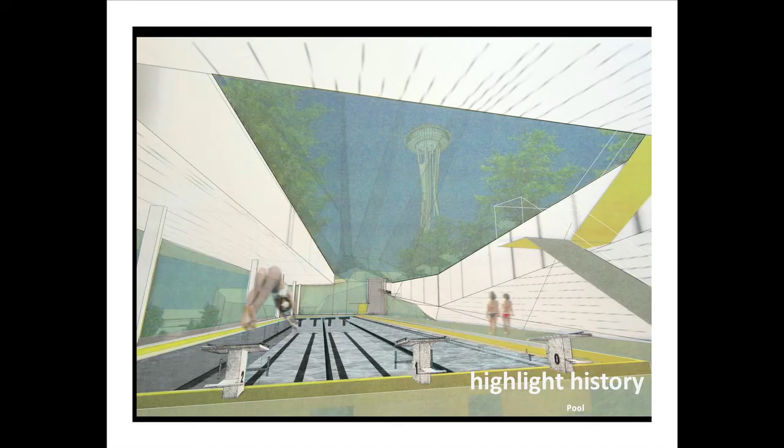And highlight history so that views really show off the Space Needle, even though they painted it to its original color, which is not a very nice color. It's actually prettier white. Encourage open-ended activities, which I kind of mentioned.

Unlock event space. This was a walled facility, and we're saying you've got to make event space work so that it's safe to be in and usable even when it's not for an event. Otherwise, you don't get enough use out of the resource. And there's a lot of sustainable strategies around transportation and water management and energy production, which I won't go into.

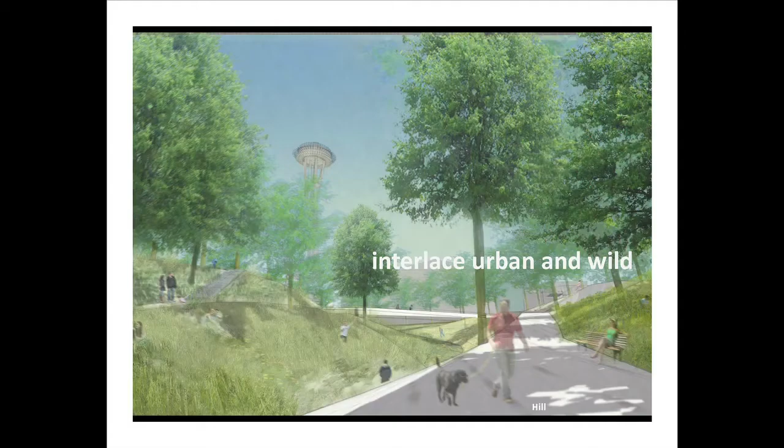And then finally, the one to me that came out as kind of the hero of all of it was this idea of interlacing urban and wild, getting more wild back into the city. And that kind of gives you the overview of those community heroes.

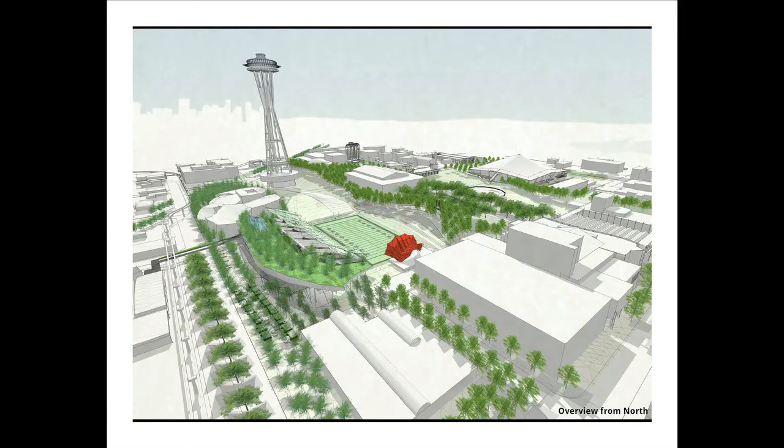So what I've been doing, I guess, is trying to show you our path of how we invent new ideas. For this, the sort of suggestion is that if I have an ocean, I would invent a boat. For us, it may not come so much that way, but is more nursed along by more hints and stuff of what we see happening around us.

And we kind of have this philosophy. The function of the imagination is not to make strange things settled, but to make settled things strange. And this comes from G.K. Chesterton. And G.K. Chesterton wrote really great murder mysteries. You have to forget the fascist part of his career and concentrate on the good.

And if you read any good murder mystery, it sets you up to expect one thing and find another. And to a certain extent, architecture is doing the same thing. It's trying to catch your imagination by providing opportunities that you'd never thought to think about, but are really there. Like that murder is always there, and it's not the person you thought it was.

So look for new opportunities, the things that you see every day, and think, like people like Miss Marple, who isn't a G.K. Chesterton character, are good at doing it. So you don't have to be beautiful, you don't have to be young, you can be anything, you just have to learn to reframe what you see and then take that knowledge and test it.